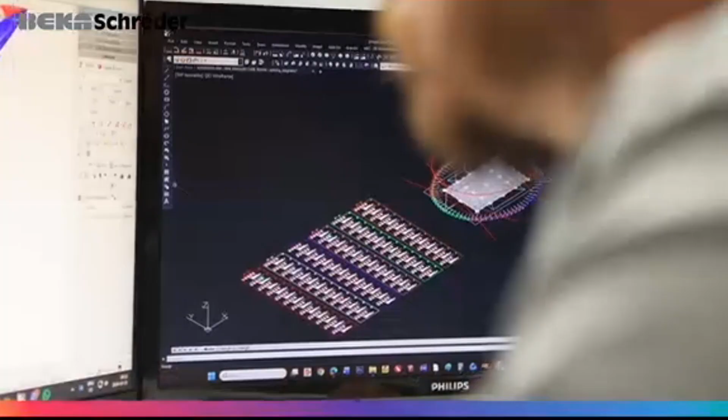At BEKA Schréder, we are proud to be Africa's leading manufacturer of luminaires and glass fiber reinforced polyester poles. Our purpose is simple: to deliver optimal lighting solutions through precision engineering, design, and advanced technology. By continuously refining optical and mechanical performance, we create intelligent, sustainable lighting systems that reduce energy consumption and lower the total cost of ownership. Through continuous research and development, we ensure the mechanical strength, thermal performance, and long-term reliability of every product we deliver. Our journey began in 1978 in Namibia, one of the world's most corrosive environments.

From extreme temperatures and corrosive coastlines to remote locations and critical infrastructure, our solutions were built to perform where it matters most. From the very beginning, we focused on durability, developing corrosion-resistant poles and luminaires designed to withstand the harshest coastal and inland environments, engineered in Africa for Africa's demanding conditions.

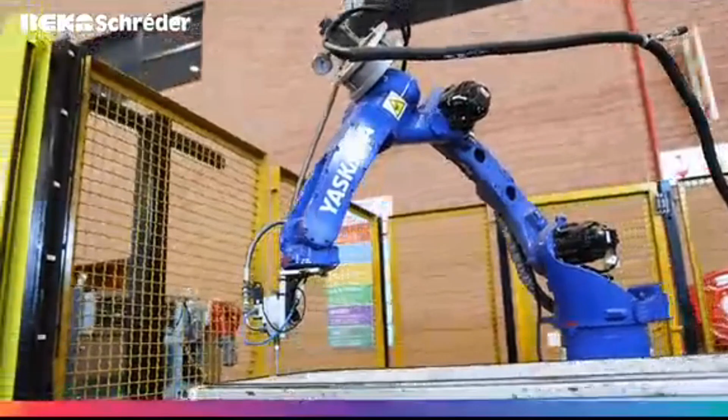In 1989, we became the first lighting company in South Africa to achieve ISO 9001 certification, setting a benchmark for quality in the industry. Today, we continue to uphold internationally recognized standards, including ISO 9001 and ISO 14001, reinforcing our commitment to quality and environmental responsibility.

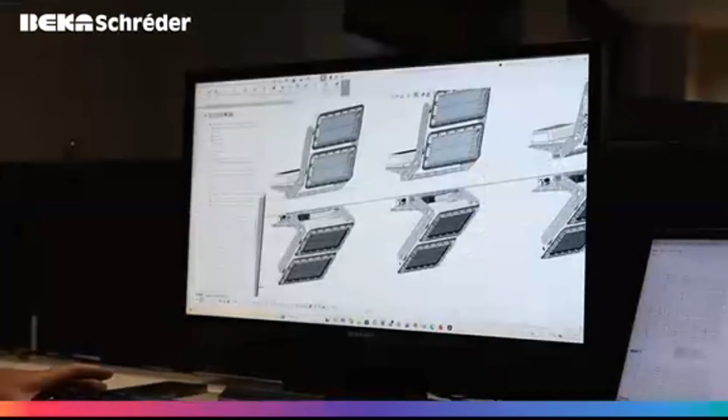Behind every solution is a team of dedicated people: engineers and designers, technicians, operators, and support teams, and our dedicated sales professionals working closely with customers. Our people are the driving force behind everything we do. Their expertise, commitment, and passion ensure that every luminaire leaving our factory meets the highest standards of performance and reliability.

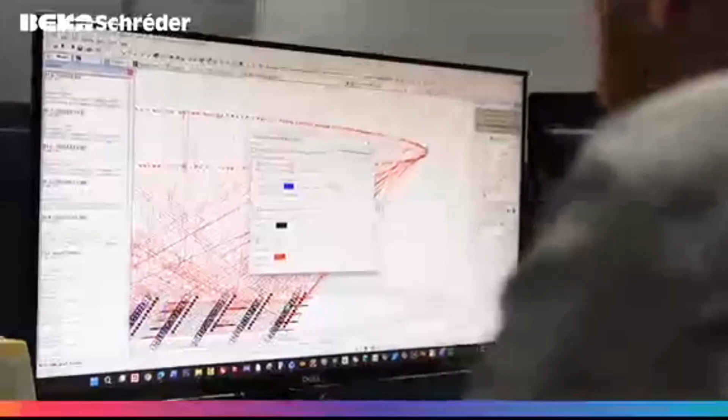Our partnership with Schréder, established in 2002, expanded our global reach and technological capabilities. By 2013, as a wholly owned subsidiary, we gained access to world-class innovation, particularly in advanced light control systems. We design lighting solutions that enhance safety, well-being, and sustainability across a wide range of applications.

Smart and connected systems, solar lighting, urban and roadway infrastructure, architectural and ambience lighting, industrial and commercial spaces, flood lighting, and emergency solutions. We work closely with customers, consultants, contractors, and municipalities, delivering more than just products, but complete lighting solutions. Through trusted partnerships, technical expertise, and ongoing support, we remain involved throughout the full life cycle of every project.

Because lighting does more than illuminate. It protects people, it empowers communities, and helps build a safer, more sustainable future together.

that we have globally. But I think the most important part of this conversation we're having today is the experience in the control solutions and the Internet of Things. The buzzwords are something next level, but I think what's important is the 20 years of experience that we have controlling infrastructure. You know, the over 3,000 projects, the 1.6 million connected light points. And already we're on our 4th generation of this, so that's where the adoption now is becoming so important because the technology is ramped up to that level.

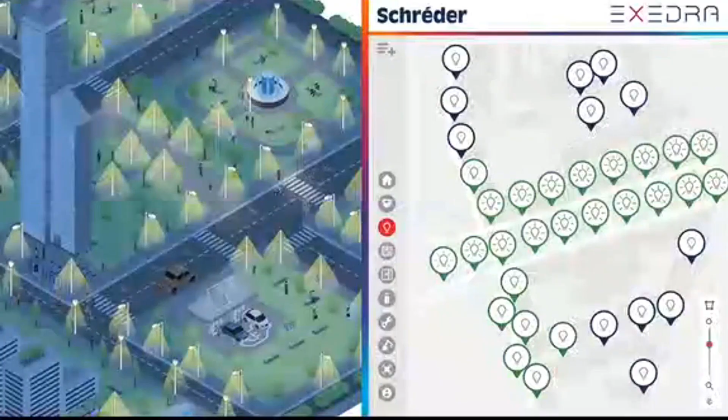To connect street lighting, the luminaires are provided with a communication node to create a network. Two types of architecture exist on the market, a star network or a mesh network. They offer very different capabilities. Wi-Fi or cellular networks are star networks. In a star network, each device talks directly to a gateway. Star networks are not very flexible and cannot adapt to local failures or urban developments. To regain full coverage, more gateways are needed. The commissioning process can also be very complex.

Schréder solutions are based on a mesh network, offering highly reliable and resilient connectivity in all kinds of urban environments. In mesh networks, the more devices you add, the more robust the network becomes. In the event of a failure or change of landscape, the mesh automatically rebuilds itself. Mesh networks allow devices to communicate directly with each other, enabling real-time dynamic lighting and easy integration of sensors.

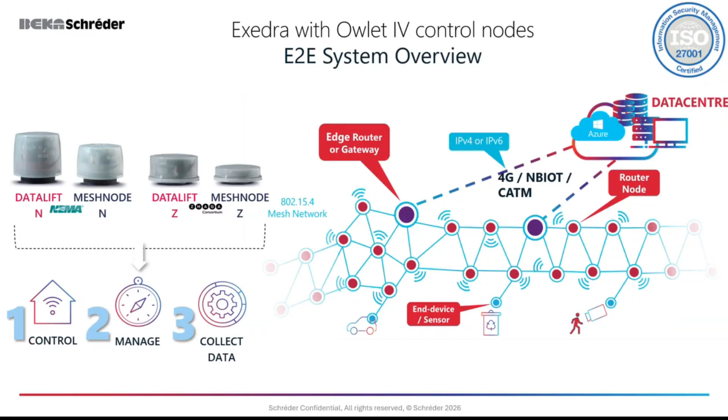Grant, can you push the next? Thank you.

So we strongly believe that openness and interoperability are a must. We don't believe in proprietary protocols. We don't believe in a lock-in effect. We don't want that. And it's not that it doesn't work. It works. It's more about the capability that we have to bring to our customers, the capability to select whatever they have and whatever new technologies can bring with that, and open a set of other systems to, again, collect the data.

And so from hardware to software, we try to pick up the most important standards, the ones that have more adoption, to make sure that we are compliant with these standards so that we can offer a more open system.

So from left to right, NEMA or Zhaga, we can have both standards from a connector point of view. Also, we support different types of dimming interfaces, from 1-10V, DALI to D4i. Our mesh technology is Wi-SUN, as already was mentioned. So it's a consortium with plenty of other vendors that we continue to work together with to make sure that we are open and interoperable, and we can use that mesh network with a set of other vendor devices.

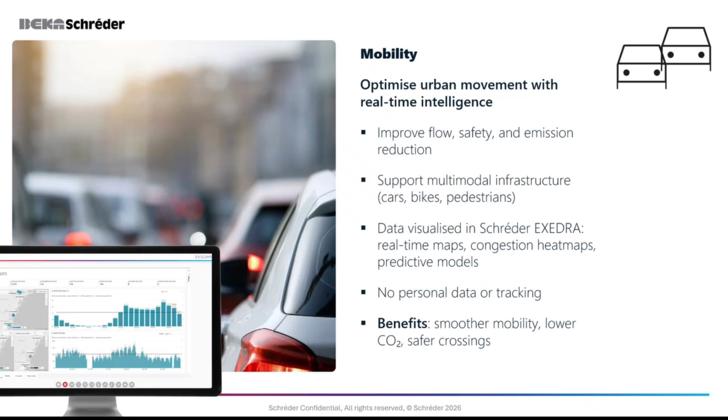And the data visibility and the data set that we get from this, understanding where the congestion is, understanding where the movement is from the cars. The cities are getting congested, so let's increase that flow. The traffic is very important. I mean, imagine sitting in front of your desktop and looking at a screen like this.

So you understand what were the total vehicles, the average speed, the peak times, understanding you could get to a point where the city is sending out information sets to say that currently the city is at a maximum during peak hours. Please, the bus services are now fully operational and no further vehicles are allowed in because we're at maximum capacity, for instance. So this is something that we can really leverage off, and the city managers can really use.

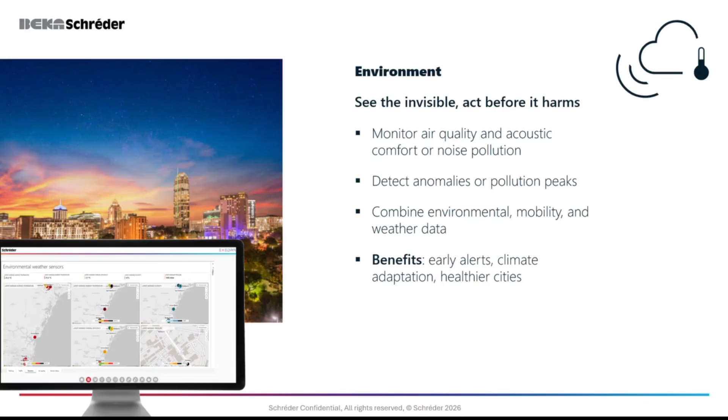The environment is important. We need to know what's happening around us. Like I said, the weather data is important. It could be anything from noise pollution to air quality to drastic change in weather, especially by the coast. If there's mist, the luminaires are reacting accordingly; we get that first-hand information of weather data, and then again the luminaires are reacting accordingly to that. And the public around that, it can really help create a safe space within the cities.

So there's not going to be any biometric or video data that's going to push through, but we just want to manage what's going around. So any specific noise, we can then react with security to go to those certain areas where there's potential disturbances, and really see where people are gathering and what is going on in those areas.

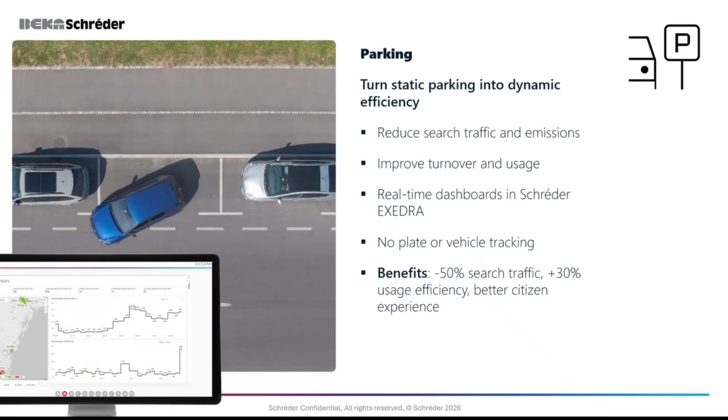And understanding the parking, because this can also be managed if there's certain events, and to understand what our people are doing and their activities, and any time scale with regards to parking, to be able to identify where there is parking, because we do know that in a lot of cities that is an issue.

And that's why the point of this is it's not just about the infrastructure, it's about the intelligence built around it now. And the data that you actually need, and what Schréder is doing, and we'll show you, is that it's incorporating all the AI involved in that, and how you can manipulate that data set to give you the information that you need, and also including third-party systems.

So back to some more realities of that and general life cycle costs. So how are you doing your total cost of ownership when you're purchasing luminaires? Are you looking at the additional savings that you get, and not just purchasing a luminaire? So you want some smart controls, you want some dimming. We all understand day burners and the importance of that because of vandalism. Dim the lighting to a certain level; that will save you energy and still be able to give you the longevity in your LEDs.

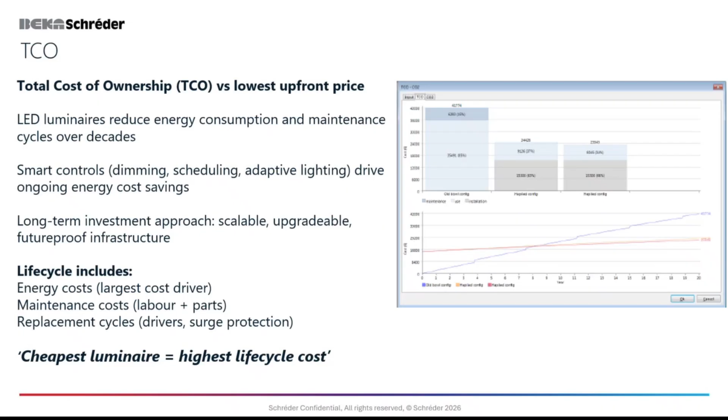So the energy cost saving approach is actually more important now than it ever was, and how you're maintaining that cost. So the life cycle of the luminaire is becoming more important, and let us assist you and consult you with that. So for what period of time, what are the warranties involved in that? Is there a replacement cycle? And coming back to the vendor to say, at this certain point, I know I will need a replacement. So please help me with my total cost of ownership.

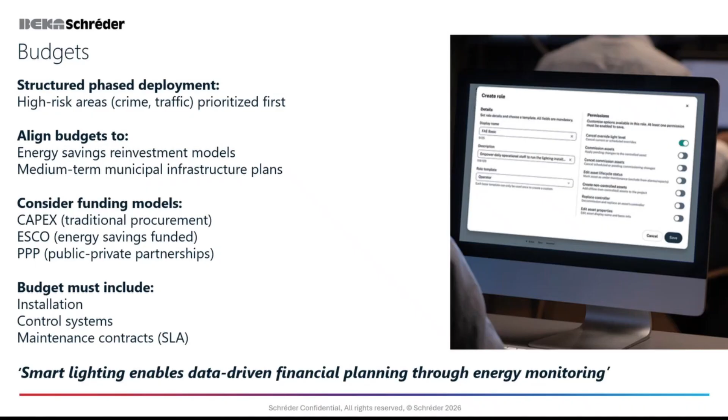And like I said, we're all busy with budgets, and we need to understand that if we've got an intelligent approach to the infrastructure, we'll be able to look at that, to monitor it, and to enable that budget information from a data-driven set that allows us to plan better, and really look at where's the capex coming from. Can we look at some energy-saving funding with regards to this? Are there public partnerships with third-party integration? This will allow you to do that with an intelligent luminaire.

And then also coming into certain SLAs with the likes of us, to understand that we want to get into a service level agreement, because we don't particularly want to worry about our luminaire. We want to manage it accordingly. We want to get the data, but everything else around there, I want you to do it, and that will allow us to give you that intelligent information and deploy the protocols and connect from the LoRaWAN, Wi-SUN into the infrastructure and give you all that remote access.

So the future-proof infrastructure is so important. And as previously mentioned, start your digital journey now with an LMS-ready or IoT-ready luminaire that allows you to upgrade when you do have budget.

So if this is a journey that you want, let us sit with you, let us consult you accordingly and come up with a digital plan in the next 1, 2, 3, 5 years, and then you prioritize certain areas. You can look at your infrastructure and say, oh, I've got 10,000 light points that I need to manage. What do I do next? But look at the zones where you actually need the data.

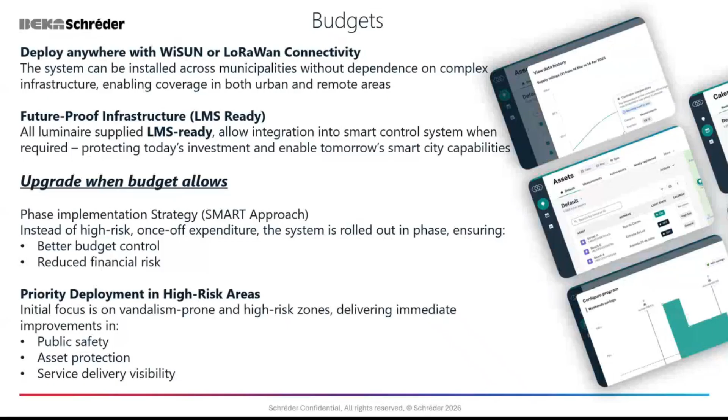That will give you instant results, and that's important. So when you're looking at your budgets now, think about lighting, because you want to have a fully optimized solution. You want to have the best possible spacing with your luminaires to reduce the amount that you've got. Yes, you want to reduce the asset quantity in general, but you want to make it as intelligent as possible. So you want to have the best life cycle cost, and you want to have the best possible design around that. And it must be compliant.

So what's important here is to look at your whole solution and how you're going to specify that, because you don't want to have non-compliance, because that's what we're dealing with in a lot of cases, and it's getting replaced. So you're actually spending your money twice. And we want to optimize that and really give you a lower scheme price. So with regards to maintenance, it's important.

And by no means are we saying that maintenance teams will be reduced. This will just optimize your maintenance team. Everybody gets a little bit nervous about AI, but it's optimizing your workspace. It is giving you a predictive maintenance schedule. It's allowing you to optimize your work schedule when we're dealing with AI, when we're dealing with intelligent assets. And it gives you that instant feedback to allow your management teams to be efficient, so everything is planned from the data that you're receiving.

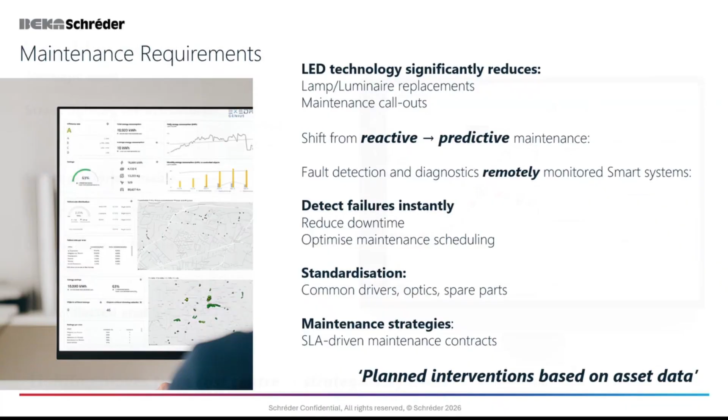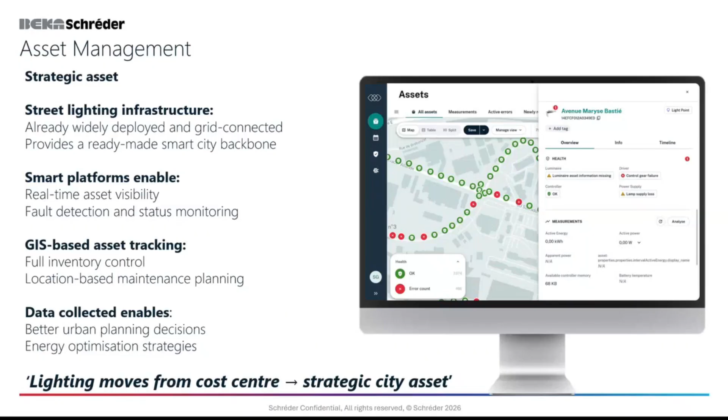The asset management is important to you, and it's not about just having a general cost and looking at this whole geographical system, but it's giving you full inventory control to know exactly what's happening. And we'll show you now in a project that we're running the information that you can get from it, so really monitor your environment, understand the performance of your lighting, understand your usage.

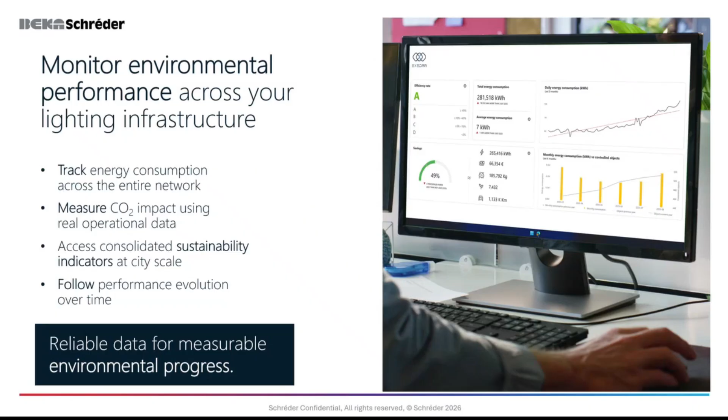You're all sitting with carbon reduction expectations. You're all sitting with the sustainability reports that you have to generate. Guess what? It can come to you in the form of this picture here. You can understand exactly the usage, exactly your carbon reduction, and really have it in a measurable way. Rui, to hand over to you.

Sure. And thank you, Grant. And so Schréder Genius, and let's pause here a bit, where I stopped in my section. That is, how can we make all this data actionable? And Schréder Genius is a service that, in fact, helps extract the value out of these systems to make sure that you can have a return on your investment.

So Schréder Genius is a response from our side to make sure that we can pass from traditional lighting, where efficiency was the main word. So we want to have LED, we want to have fixed schedules. The maintenance is reactive. We have limited data, and so on. So efficiency was the buzzword. Now we are connecting light, and so we can do more use cases.

We can have adaptive dimming. We can have adaptive lights. We have real-time visibility of what is happening. We can control remotely and avoid people going for manual interventions, or going already with a lot of information of what needs to be done. But that is a bit the static mode of connected, as Grant was also mentioning. And we need to make it actionable, and for that we need to manage the light.

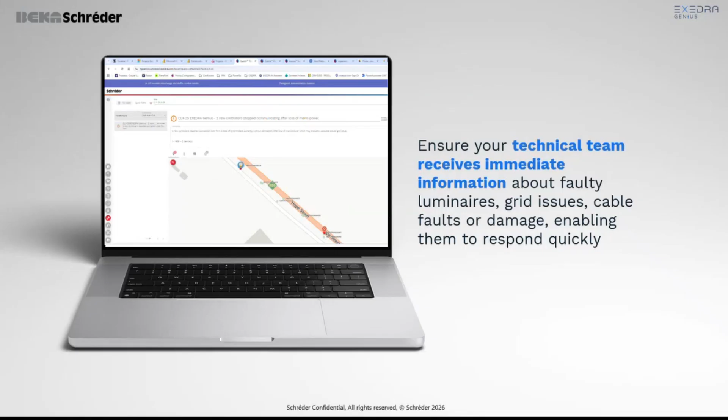Then on the next slide... It's on the next slide there, Rui. I don't know if you can see. Okay, can you go to the... Yeah, already? Yeah, the next one. Okay. Oh, at this time I go. Yeah, indeed. Thank you. Okay. You can go to the next one. No, this one is as well. Thank you. No, that's okay.

So this one is a good example of a potential pole hit that exists. Imagine that in your installation there is a specific issue, a faulty luminaire, but with already more insights that it's a potential pole hit. How can we do that? Because in our controllers we have a tilt sensor that is remotely configurable to the degrees of this tilt. It's not for vibration, it's really for pole hit. And having this information, or combining this information, we can give precise insights of what is the issue. So at the end, the system will discover that it is a grid issue, but what is the real root cause? It is a pole hit.

And so that is the type of information. After that, we can also prepare, from a Genius perspective, weekly reports that you can receive with all the information of the week, all the knowledge that exists, but also for your teams to already have the location and check in Google Maps, for instance, where it is, how it looks like, what is the street view effect of it. So something that brings more and more information so that you can prepare your intervention.

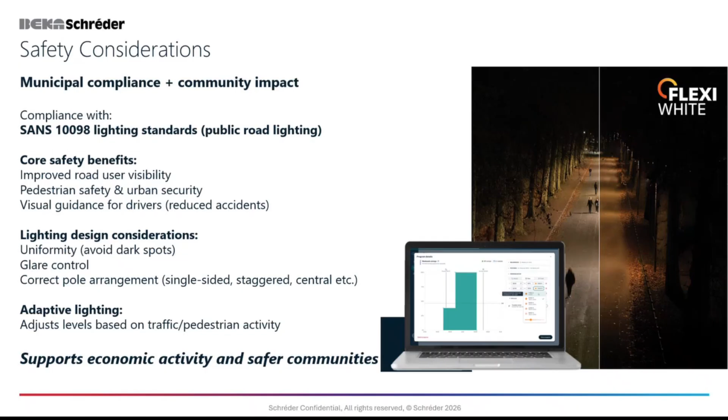But we want to make sure here, and I think you're all going to say, yeah, but vandalism is real, and how do we handle that? What I'm going to show you now is all the vandalism prevention strategies we can incorporate, because it's something where we want to protect the asset.

You might say this is a pipe dream, but it's a conversation between waterproof and water resistant. We take every preventative action to try and make sure your investment is protected, not just in the monitoring platform, but looking at the whole infrastructure, the design of the luminaire, and how we can implement things to protect your asset and investment.

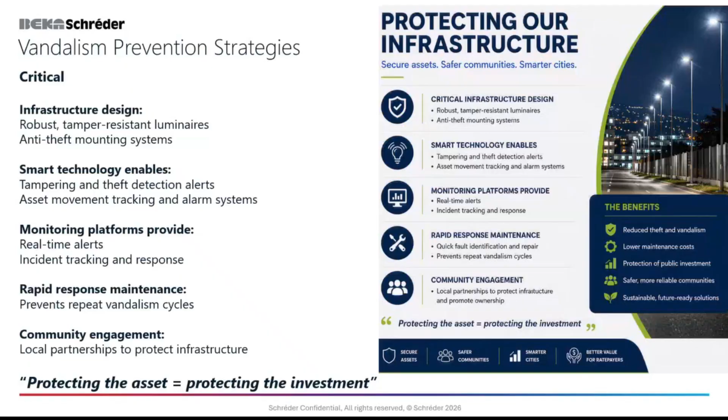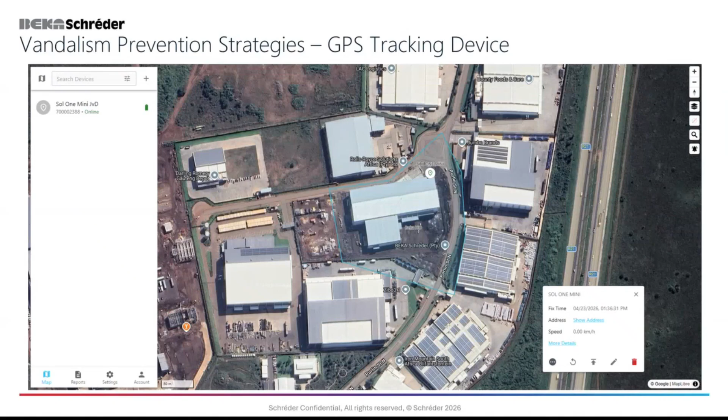Here's one of the GPS tracking devices we include in the luminaires. We create a geofence around your project, and we have a device within the luminaire. If at any point that luminaire is outside that area, it will start to track based on the geofencing it's gone past, or there's a tilt involved.

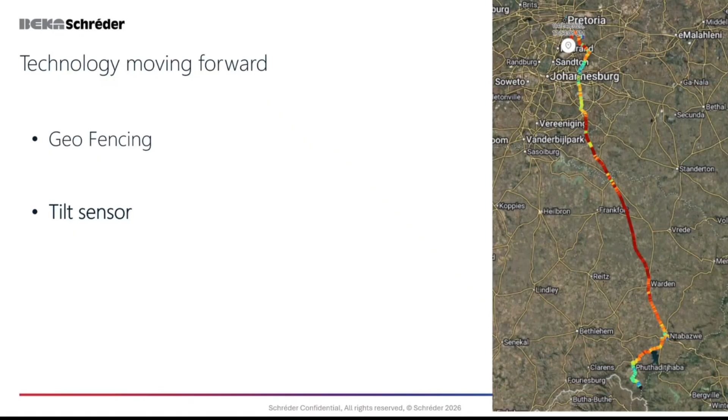This will start to monitor. It has a 3-day battery life before power is disconnected. So if the alert you get from your system isn't quick enough for someone to be on site at the right time to prevent that vandalism, we are now tracking that vandal to that specific area. For 3 days, that will give us a GPS coordinate to that.

So we're not only securing your asset where it's installed, if there's any tilt involved, if that's removed, we'll start tracking. I think that also gives peace of mind that we can now really protect our asset.

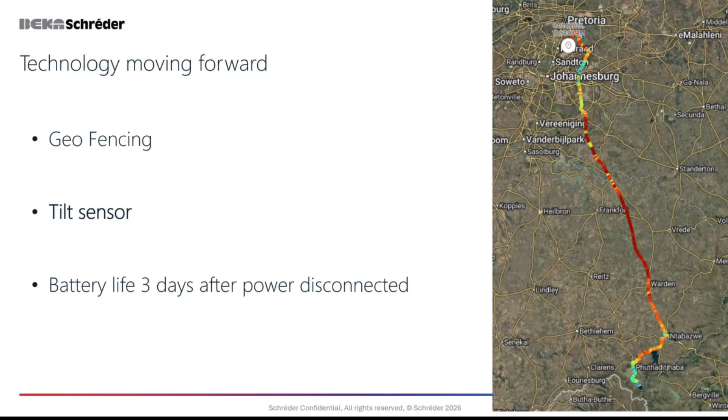We're also using data dot technology, so the luminaire is really going to be as secure as possible. It's all about word of mouth eventually, it's going to leave those luminaires. They're not only tracking, they're going to know exactly, we can rip it apart, but there's data dot technology in it, specifically if you want to use the material involved, so they can track that, even if it's ripped apart. So it's not only protecting vehicles, we also really can protect your asset.

It is connected, it is online, it is secure, it is vandal resistant. I think that's something where the growth for that is amazing with luminaires. If you look at the mobile devices and how that's evolved, luminaires are doing the same.